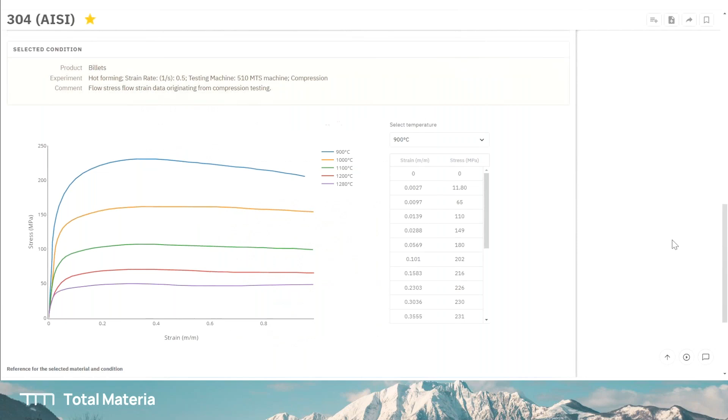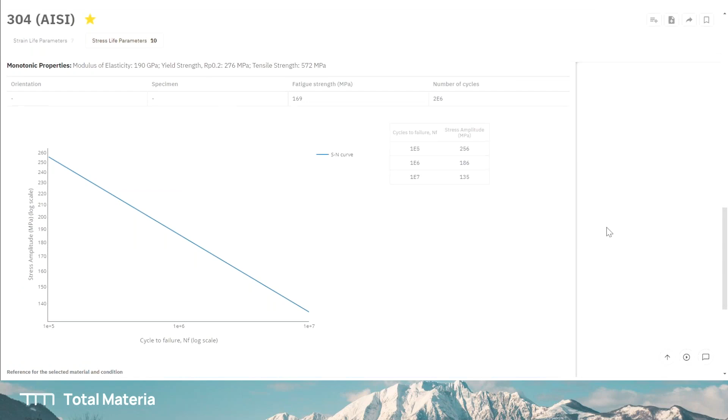Directly to producer's data sheets you can reach. For instance, here in this example, 304, AISI United States standard material, as you can see, we have thousands of mechanical properties and hundreds of physical properties, so many joints with which electrode to joint this material, information, corrosion information, stress strain curves, and here's the joint information and new mechanical properties there, S-N curves about the materials and detailed information. And as you can see, corrosion information.

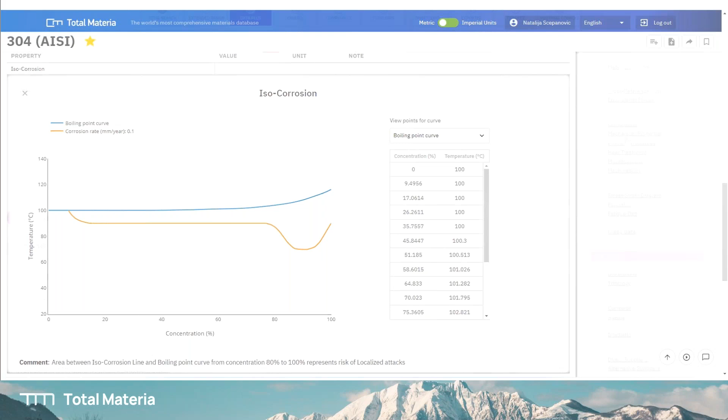10,172 corrosion tests actually made for this material, and you can reach here in this tool the material under the material card. So temperature dependence information in different standards, different heat treatments, different forms, different dimensions of the material.

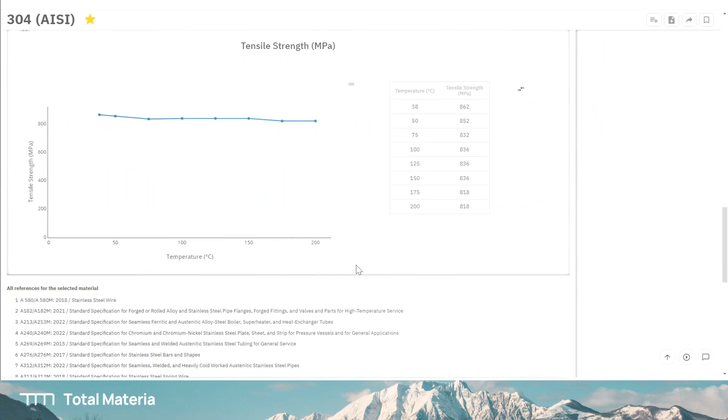Of course, it will give you different mechanical or physical properties, including how it affects the weatherability, aging information, corrosion information, irradiation information, where you can find this material basically from the suppliers. You can reach all this information in an all-in-one solution, Total Materia Horizon.

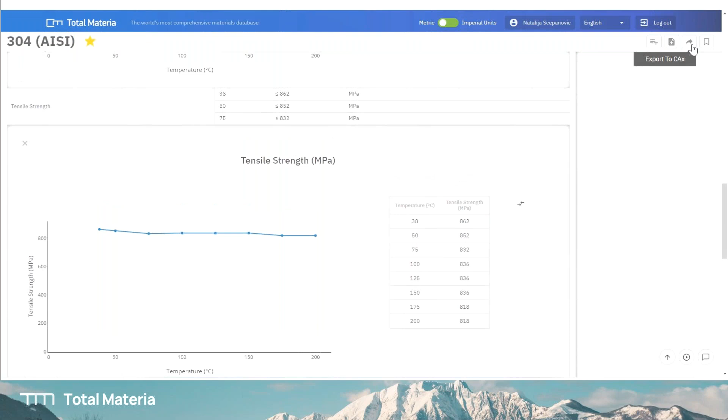You can add this material information into your reports. You can select with one click to export this material data card into your simulation software. We are supporting over 28 different simulation softwares, including Abaqus, ANSYS, Dassault Systemes tools, and Siemens NX, and others. When you export this material card, this material card will be readable for this simulation software.

And also, when you check this material's alternatives in different standards and different producers, you'll have cross-reference and equivalence information. For instance, here we are just filtering Chinese GB standard equivalence of this material. With one click, you can compare this material side by side according to chemical composition, mechanical, and physical properties easily.

You can save this file as a PDF. You can send it back to your manager or anyone you want. So this will be highly reliable, quick information that you can reach, and it costs you only seconds. I mean, in seconds you can reach all this material data information.

You can create your material lists, and in advanced search, when you are looking for a material, for instance, it could be ferrosilicon, could be stainless steel, could be any polymer that you are looking for, but according to this mechanical or physical resistance.

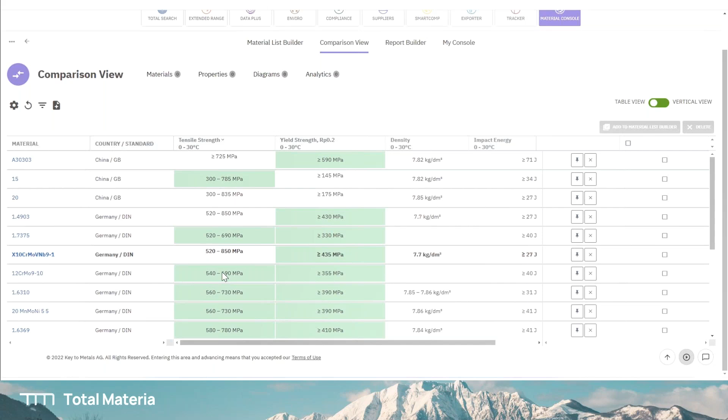You can compare this material still side by side. You can keep searching materials, mechanical, physical properties, and you will find the best tensile strength resistant one of them, or you can add this material comparison side by side, or you can forward this material list to analytic view. So in this case, you can compare this material, find the best one for your design, and produce the best material, so that we have these industry leaders as references.

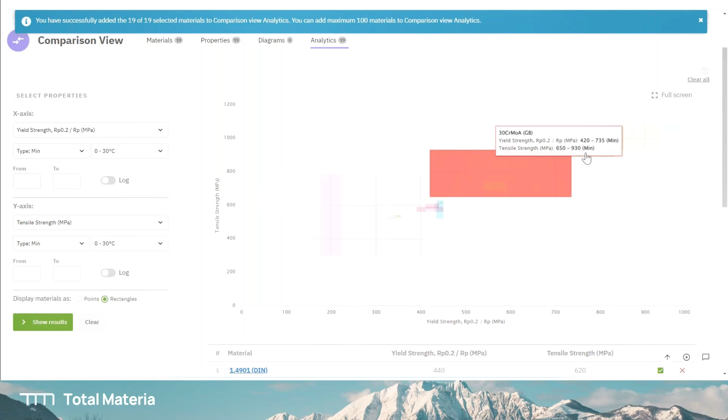They keep using up-to-date material information. We have a lot of material information inside Total Materia. You can check these materials, which one is compliant according to different standards, up to 5 standards, up to 5 regulatory at once. In SmartComp, you can check your product quality for quality control, or you can check the material's chemical composition and which material this belongs to.

It's easy to define. What about Integrator? If you would like to have a private enterprise solution to safeguard, enhance, and connect your materials' intellectual property, this is the best way to keep your company's material research knowledge in your server.

So this will be only and only your material list. Nobody else but you can reach Integrator, and then you can deliver approved materials information to the right teams in the business. Superset commercial grade and internal test data in one defined data structure. Ensure compliance control is built into early phases of the material selection process.

So what gives you system integration? Whatever you're using, a PLM system or ERP, it works with that legacy of materials. RESTful API and test data integration. When you have your own testing department, testing machines that you use to understand material information, you can add this material test results into Integrator under the name of this material card. So you can basically make your own material process list and material information, and it's very safe to use.

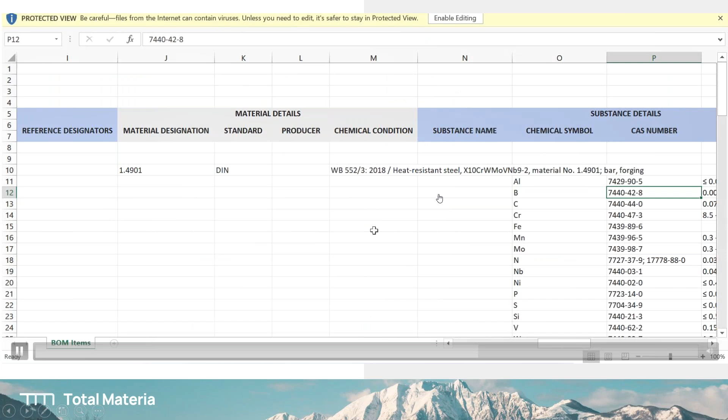As you can see, many materials are compliant according to REACH and RoHS, but California Proposition 65 is not. You see it contains chromium as a warning, and according to chemical composition, these materials are not compliant under California Proposition 65. It's easy to find out which material is not compliant, so better don't send this product to this location. You won't be able to export this product given this compliance information.

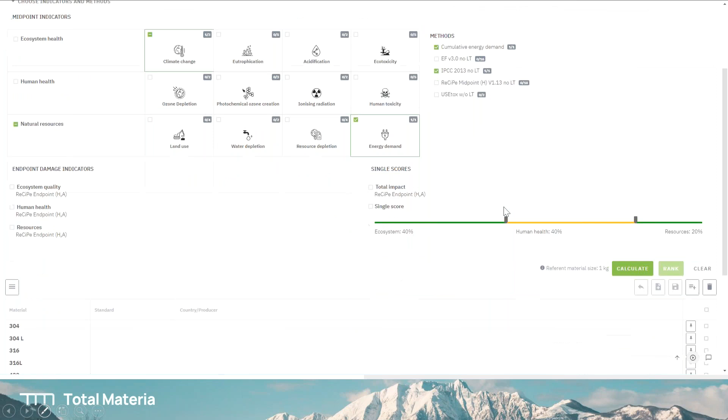So this is one tool, BOM, and this is another tool, LCA, which gives you a very wide range of insight about how the materials you're using for production affect climate change or energy demand. You can choose different calculation methods and indicators, and clearly see which materials are green and which are not that green.

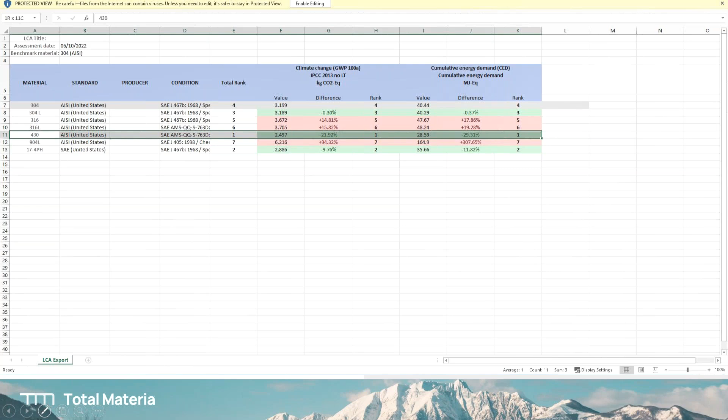And here is our AI tool, Predictor. Predictor fills the missing gap, using learning-driven material property modeling prediction to accelerate material selection and reduce testing costs, driving more accurate material performance knowledge.

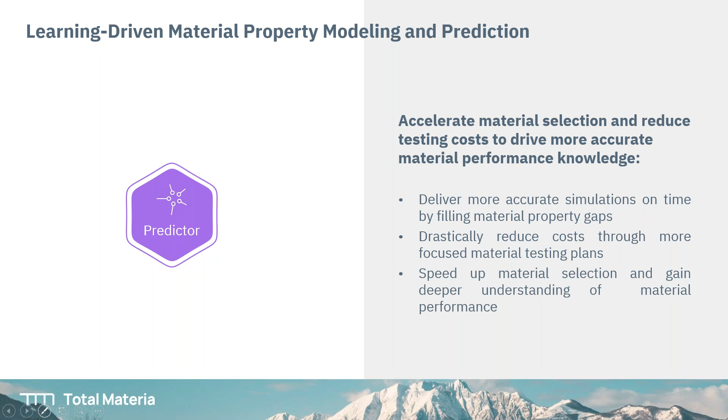So the AI tool delivers more accurate simulations on time by filling material property gaps and drastically reduces costs through more focused material testing plans, speeds up material selection, and gives you deeper understanding of material performance, because so many materials' information is not provided by standards or producers' data sheets.

Even if it's provided, you need more temperature-dependent predictions, right? So what are you going to do, test all these materials? No. Give Predictor a chance to simulate this process. It will give you mechanical property predictions, temperature dependent if you want.

If you want, it will also give you physical property predictions, temperature dependent, with quick and easy calculations, because Predictor has 700,000 material points for reference and over 25 million properties of these materials. So there are a lot of reference points Predictor uses to make precise calculations.

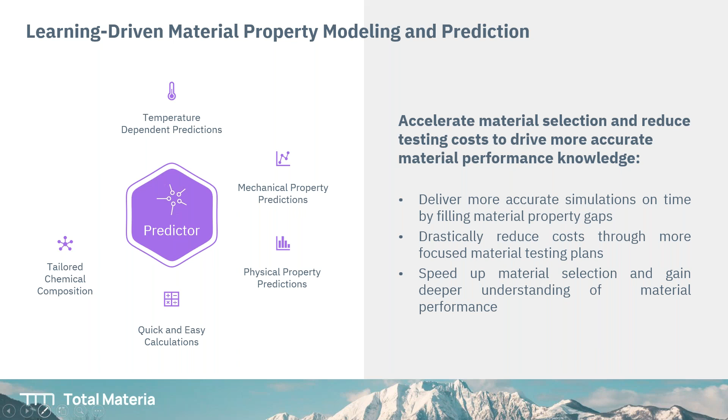So if you are just working on an upgraded material, let's say you put a chemical composition into Predictor. Let's think you are changing some of this chemical composition, like a polymer, a metal, or an aluminium product. When you decrease some aluminium content, or increase some carbon content, you can see how it affects mechanical or physical properties, and you will always have accurate predictions with Predictor.

Remember, SmartComp has been online since 2007. When you upload a material's chemical composition, it will tell you what material this is. It's very useful for quality control and reverse engineering.

And since 2007, the technology has upgraded a lot. You see this material has only two mechanical properties, and no other mechanical properties. What are you going to do, test this material, or simply check this material's composition and ask your AI tool to make a prediction?

You want the modulus of elasticity of this material, but you have no data. You want the temperature range, and with one click, in a second, you have it.

As you can see, Predictor is also telling you test performance and dataset size rating, meaning that it is very confident its test performance is accurate, and that it had a lot of reference data sets to make the precise calculation for this result.

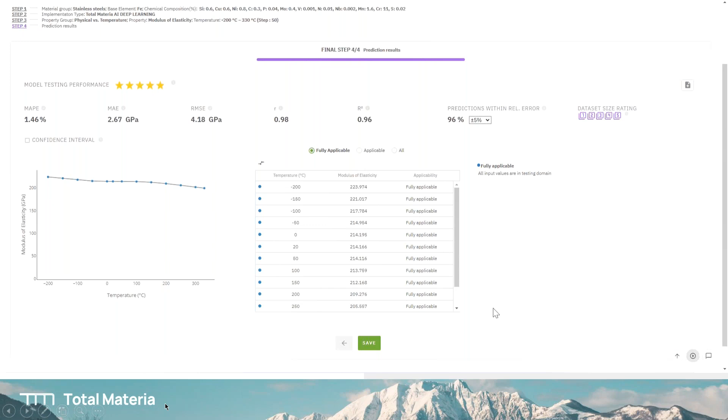So you can easily use this prediction in your simulation software or so on. Here's another example that might be a very popular material, with a lot of mechanical and physical properties on it. 7075 is a very popular material for the aerospace industry.

But here we are asking for mechanical properties by T8 heat treatment. We have 7075 AA inside all materials, with thousands of mechanical properties, hundreds of physical properties, different heat treatment options, and detailed information. But when you look for yield strength information about this material in T8 heat treatment, even though we have tons of different material heat treatment information for yield strength, we don't have it for T8.

Easily and faster, you're choosing mechanical property you want, you're choosing heat treatment, you're choosing dimensions of the material. It's very related to product form, then testing direction, and which temperature range you want this information and testing results for. In one click, you have the result.

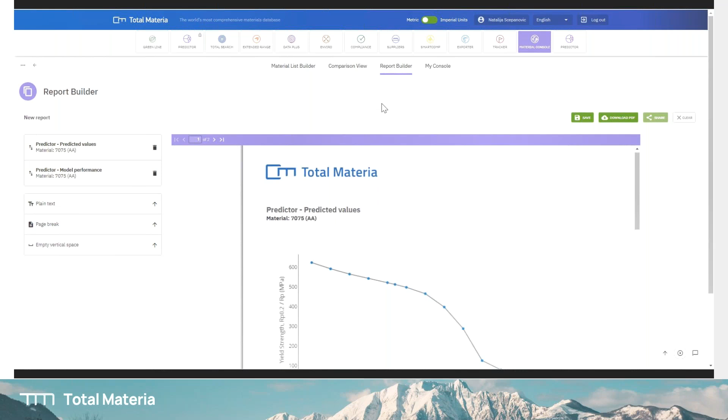While testing performance is five, we have a lot of reference data set rating. Here's your result, you can save this result, you can use this result in your simulation softwares, and you can create a report for that. You can save as a PDF or share with your friends anywhere they are with that link you're creating. If they have Total Materia access, they'll be able to view your report easily. Or you can save it as a PDF and attach it to the email.

Connecting to design and simulation, yes, we are supporting a lot of formats for different simulation softwares, including Abaqus, Ansys, Siemens NX, SolidWorks, CATIA, you name it, and one-click predefined form exports, bulk data exports for library population, PLM and ERP connection, documented REST API.

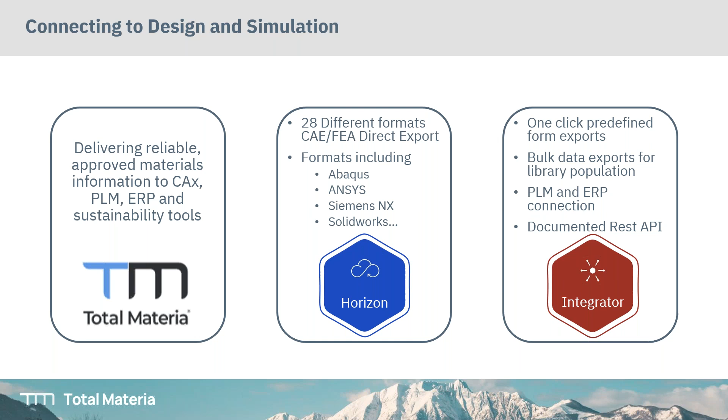The carbon footprint module will be launched very soon, and on the 7th of December we'll have a specific webinar for that. If you would like to know more about carbon footprint, I will send you, after this webinar, recordings, and if you would like to have a meeting with us, a link and register link for this webinar covering detailed assessment, effective replacement, robust data sheets, and trusting results.